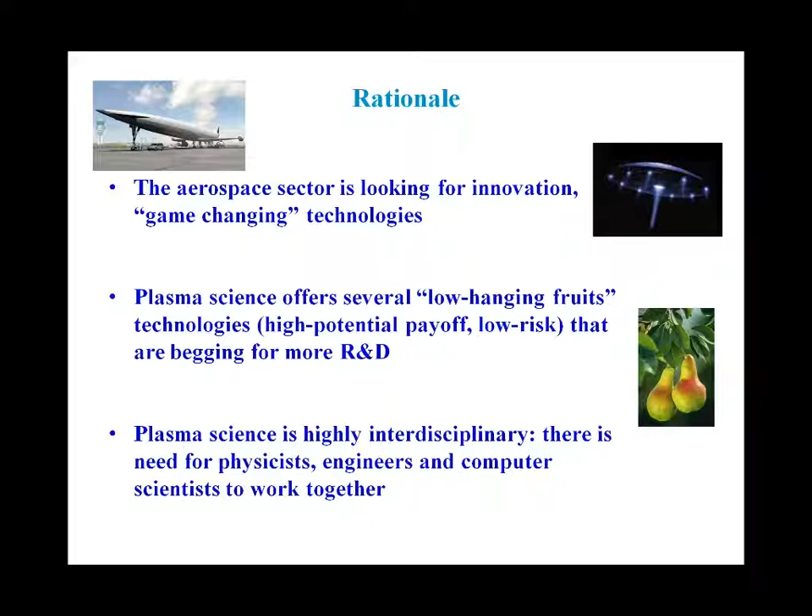Now as far as we are concerned, UHCL, we're trying to build a little more momentum in the collaboration with the local aerospace realities, which are mainly NASA and satellite companies. We also have a collaboration with a major aerospace engineering department — they being engineering and we being physics. This shows that we're implementing exactly what I said in the previous slide: we're trying to join forces to get some projects off the ground.

The purpose of this talk is basically to stimulate interest, whether it's somebody from NASA or from the university, to create a connection through students and the workforce that already works on NASA.

Well, we are in a sort of impasse, and everybody is saying, well, we can't do anything because we've got no money. So how are we going to get out of this? There is something that can be done with little — it's just a matter of striking an agreement with somebody else that's already working on it and moving on.

Another obstacle we face several times is that management will not jump into something new just because it looks good. You can say what you want, but you're not going to convince somebody who's never worked on, say, advanced propulsion before, to put money, time, and people into this new endeavor, even if it looks good and looks required and necessary. You have to build credibility — you have to have somebody else they can rely upon, to make them feel comfortable. That's when, with partnerships with universities and, for example, NASA JSC, part of these problems can be solved.

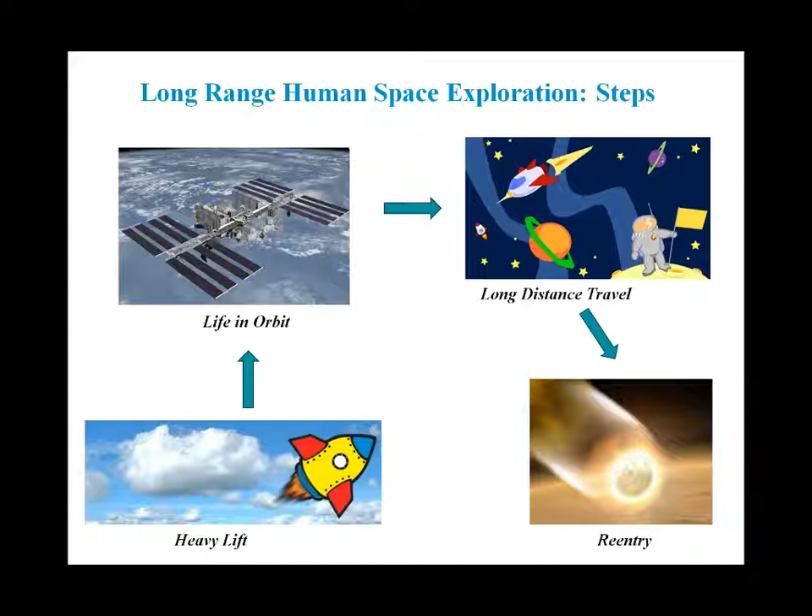The real problems are these: okay, the heavy lift is just a matter of money, and life in orbit — well, that's a picture of space junk.

We are not necessarily in the know for that. For long distance travel, space radiation is the main enemy. When the spaceship leaves the magnetosphere around the Earth, things are going to get much worse, because we're not in this kind of cozy environment we are right now. All the radiation we can get, we'll get, and sometimes the sun is misbehaving, so it's going to get even worse.

Re-entry is another critical phase, not just for landing back on Earth, but when you're talking about going to Mars, you can use the atmosphere on Mars for aero capture. But you have to design things properly. You can save a lot of fuel if you do things right, and you can control your descent carefully. That's obviously the Apollo capsule, like a fish out of the water. You can see the damage from the heat. Of course, it was designed to survive it.

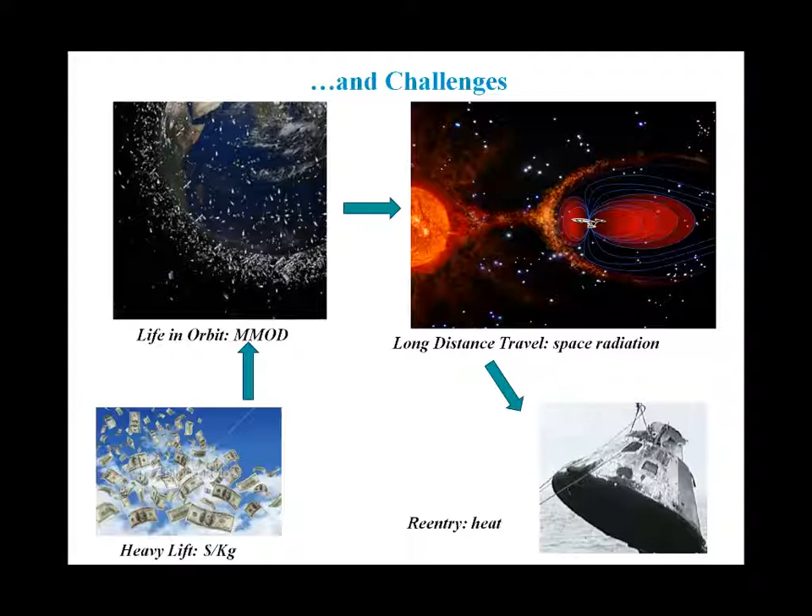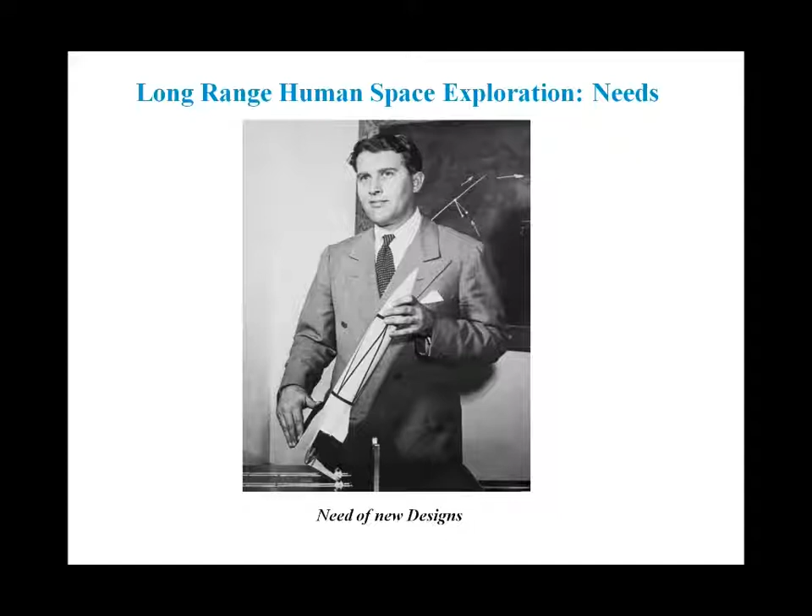All right, so what do we need? We need new design. This gentleman a little while ago came out with creative ideas, and that's how we made it to the moon. Now, can we match his ideas? Can we do something that at least gets close to that?

Since we were talking about plasma physics applications, I will briefly touch on what plasma is. Most people probably know, so I'm going to keep it simple and straightforward. Let's say plasma is what used to be at the beginning, it's something like an ionized gas, but a little different. I'll try to summarize the main point here. It's more of an academic distinction, if you like, but it has some engineering consequences.

So the first state of matter, at the bottom, lots of plasma, like the familiar plasma ball that everybody knows. It's an ionized gas, but when you have a distribution of particles that's almost uniform everywhere and doesn't allow for strong fluctuation of charge, and you have enough particles to produce collective motions where the particles move all together as opposed to single particle trajectories going around, that behaves like a plasma. So you can actually have waves and some plasma confinement. Those are the things we use to manipulate plasmas to create the technology that we want.

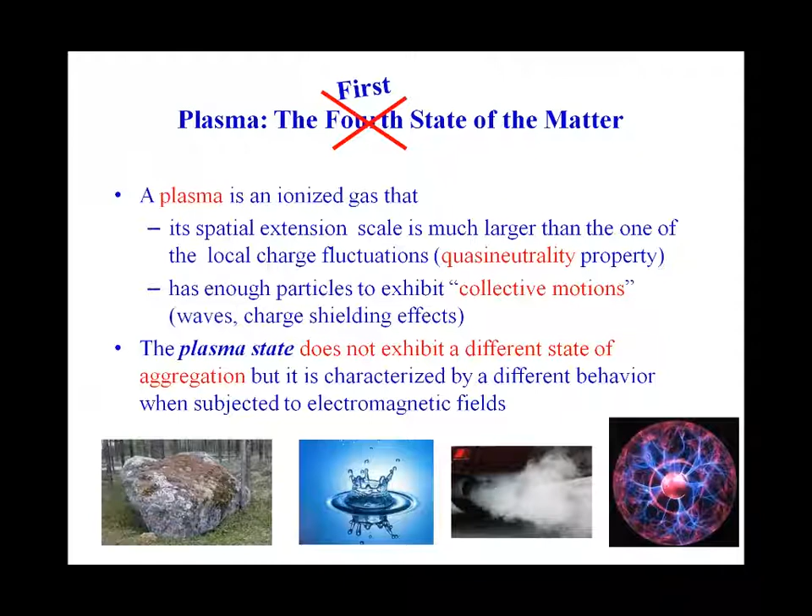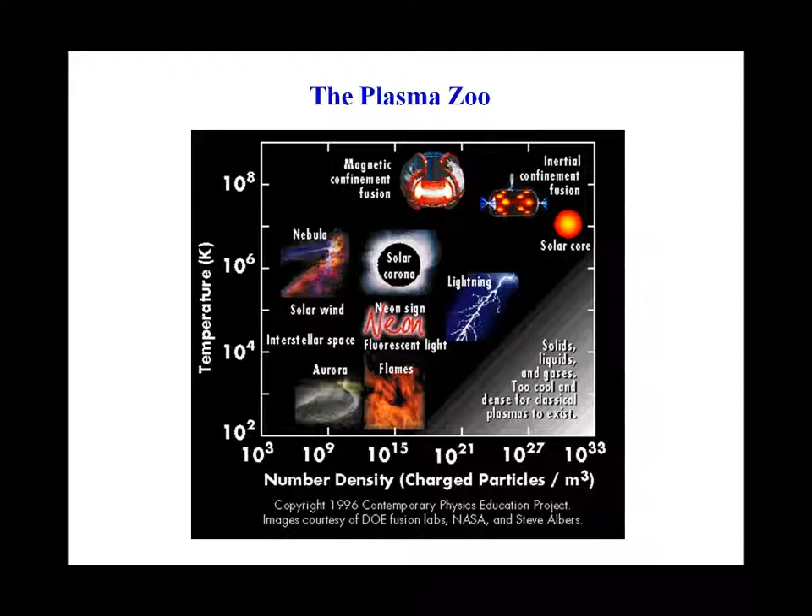Plasmas are everywhere, as you've probably seen this picture already too many times, but the point is that temperature and density are the main parameters spanning a very large range. On Earth, we're mainly concerned about cold plasmas; in space, on the stars, the plasma is much more energetic. Around the Earth, for example, the ISS is floating through an ionospheric plasma, which is very tenuous, yet it can cause a lot of damage because of the energy of the particles.

Okay, so this is enough plasma physics for today. These are some of the applications I want to touch on. Maybe there's something else, but these are perhaps the most appealing, and they fit the picture of the journey I described before: takeoff, heavy lift, life in orbit, a long trip somewhere, exploration, and if you get there, landing and coming back.

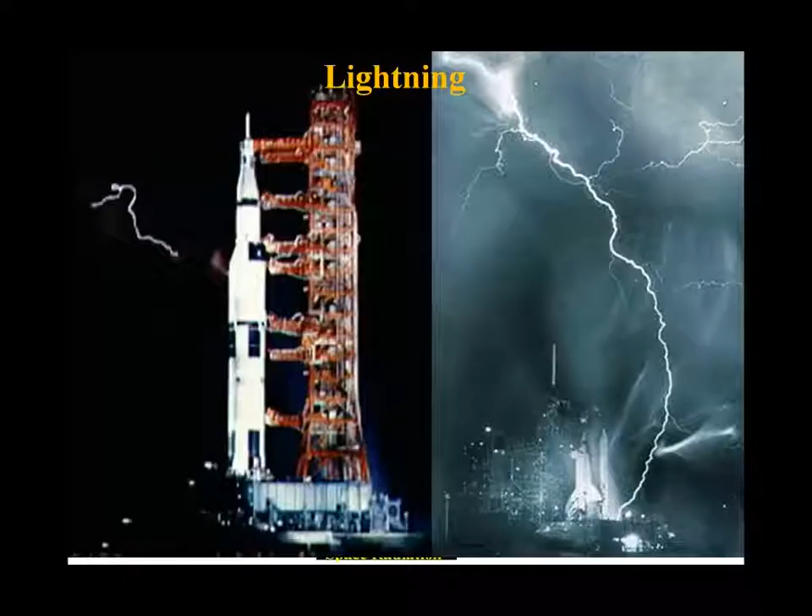What's the point here? The point is that right now we're moving towards composite design for aerospace, mainly aircraft as well, but both aircraft and spacecraft. So the conventional technology of basically making a missile out of a metal tube isn't going to be there anymore, and we're going to be exposed to lightning.

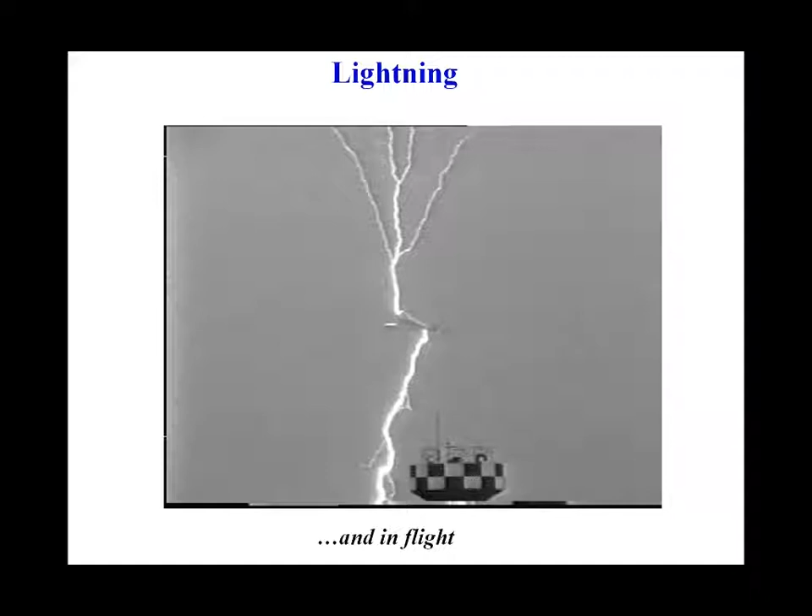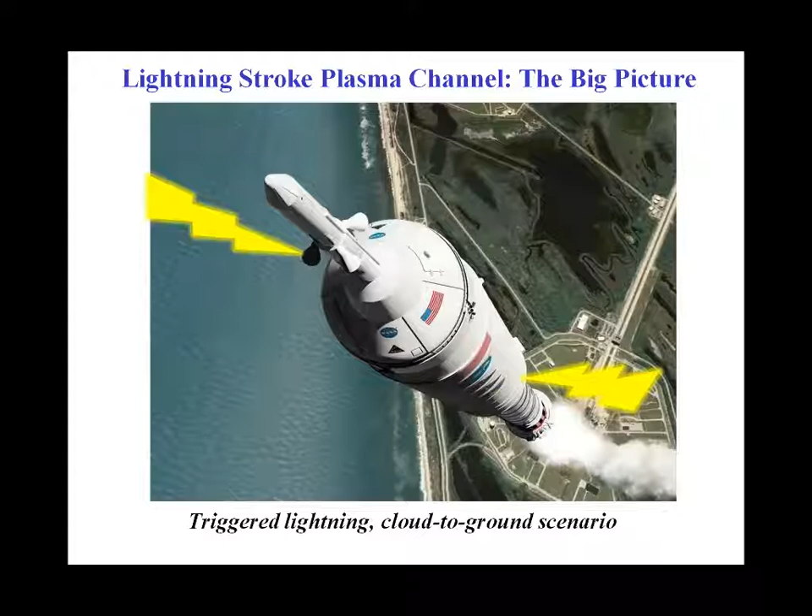Well, what happens is that if the electric field in the atmosphere, especially in the upper levels, is high enough, you can trigger a lightning strike. Because you stick a piece of metal into the atmosphere, you distort the field lines, and that's the kind of mechanism why you get lightning.

Now, if you launch something that does not have enough metal, it won't be certainly metal free. You can't make a rubber or composite metal free. Suppose the composite would be a shell around - okay, you still have metal, so you still have that effect. But the point is that if you don't have a metal shell, the lightning is going to hit you, and you're not sure what's going to happen next.

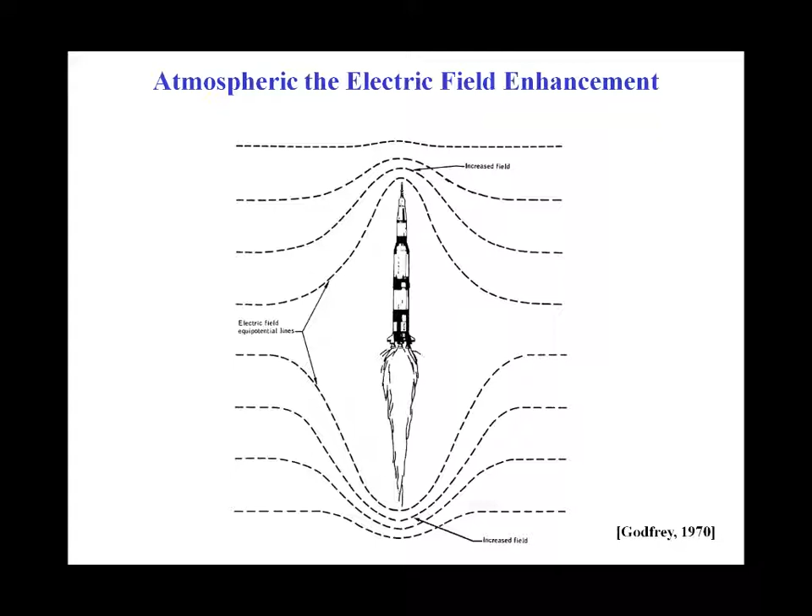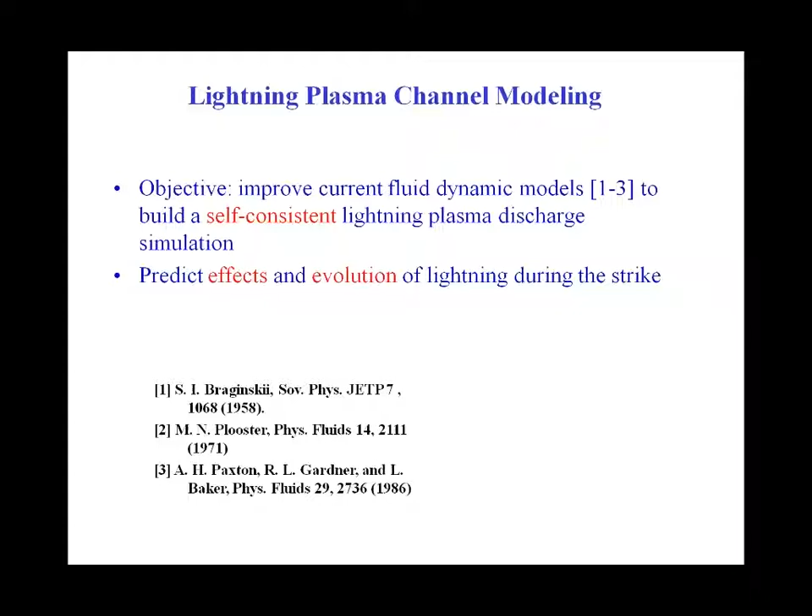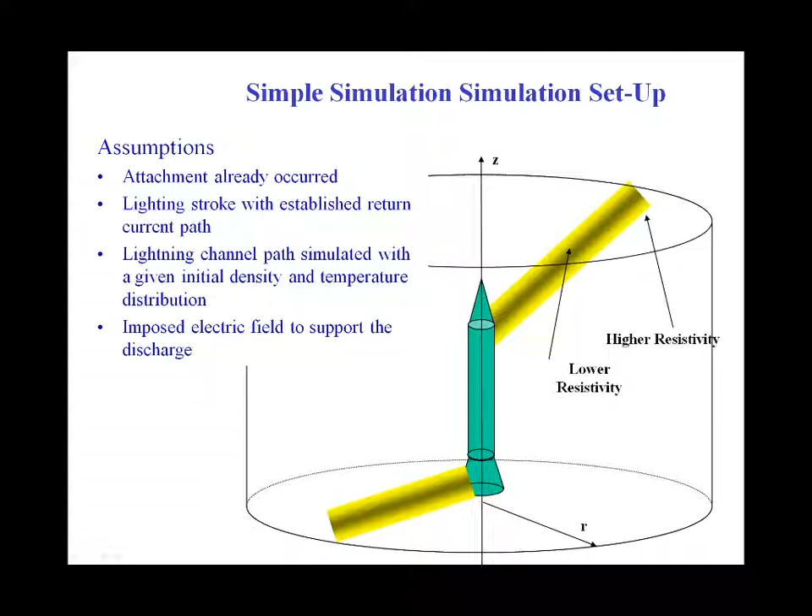So one application you can tap from is plasma modeling for studying lightning plasma, and this is an example of the kind of simple modeling you can do with a plasma discharge already set up. You have a sort of sketch rocket, and you can look at what's happening with the electric and magnetic fields while the discharge is running.

You can do something more, which has been done in the past. This is a sketch of a lightning discharge that hits this piece of metal here, and this lightning discharge is moving with velocity v right here. So we can actually simulate how the lightning discharge sweeps through the rocket, because when the rocket goes up, you have a relative velocity between the rocket and the discharge, essentially in the cloud.

And so you have this phenomenon where the lightning hits you here, and then the plasma flies through, and it may hit different points. So you can calculate the most probable locations for a lightning strike, but you don't really know what's going to happen next. So you're going to be very conservative and say, okay, let's put metal everywhere and make this rocket really heavy, to be safe.

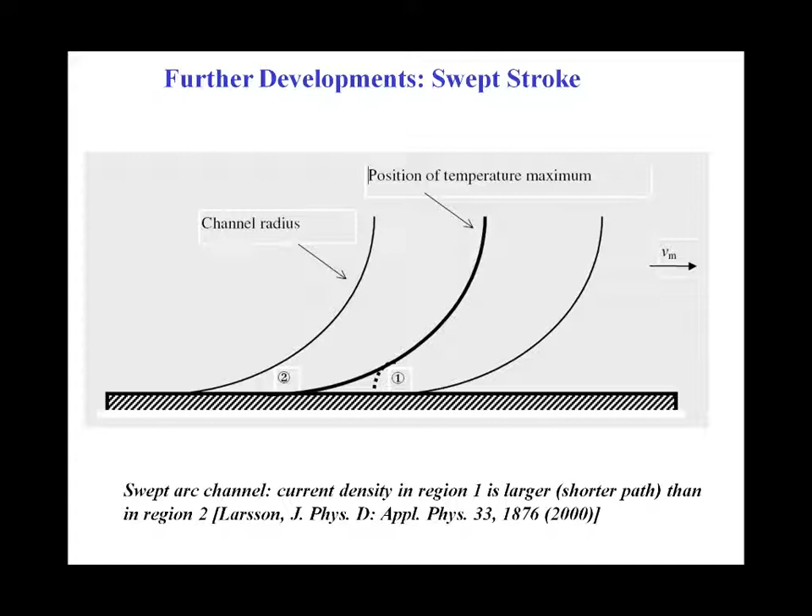But this approach is not going to fly. So you have to do the smart way - trying to figure out, okay, these are the critical areas, we're going to protect these, and then that's it. So this is what we can do with lightning plasma modeling.

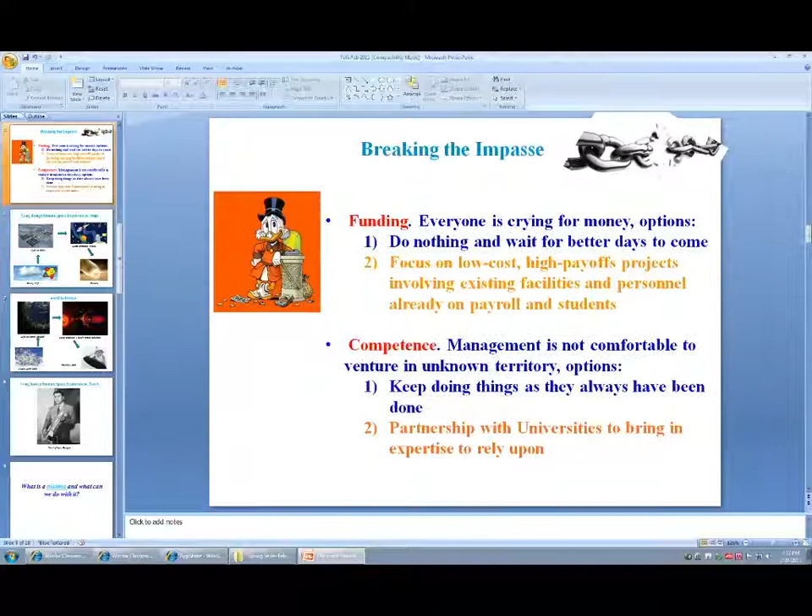Now we want to go up, right? We were here on the ramp taking off. Another issue is... okay, let me have it. Okay, I'm going to do it manually. It's not working.

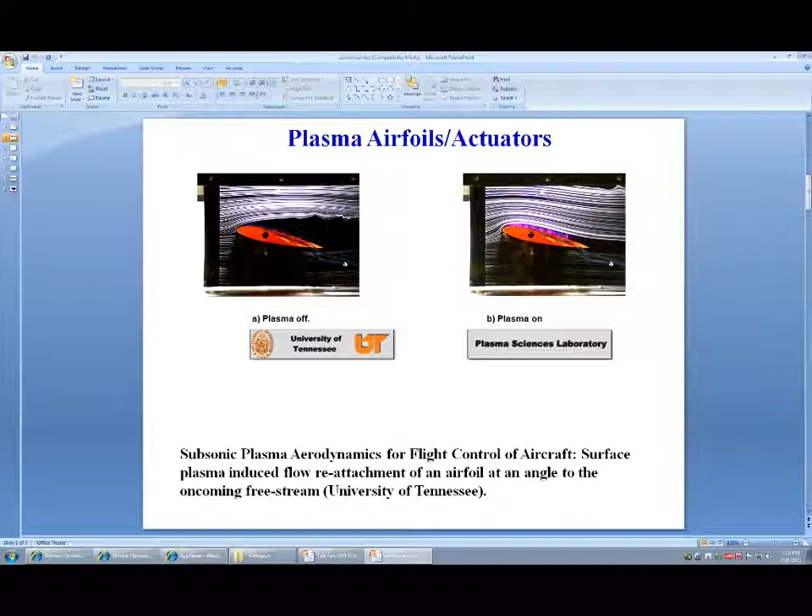Another issue is how to take off and send a heavy load into orbit. So, okay, well, we know how to do it - we went to the moon, so obviously we know how to do that. But the point is, it's expensive. Is there a better way to send a pound in orbit and pay a lot of money?

These studies have been done for quite a while. Started in Russia, with applications for hypersonic aircraft. There were some aircraft concepts that were supposed to go at Mach 7, 8, or even 10 and beyond.

Well, what happens is that at that speed, the scramjet, the supersonic combustion jet engine, doesn't work very well, so the efficiency is lost. So, well, you can stick to a rocket, but then the problem is the rocket has to carry both oxygen and liquid hydrogen. If you're using liquid hydrogen, you have to carry the oxidizer with you - you can't take advantage of the air anymore.

So you want to still take advantage of the air, burning fuel using the oxygen of the air as much as you can before switching to a rocket. But if you're going that fast, the efficiency goes down.

So what we're trying to do, the idea is to take the air that comes in and make it go through an MHD generator, which I'll show you what it is. It's something that produces electricity, and it slows down the air a little bit. And then we go through the regular jet engine and get it exhausted out.

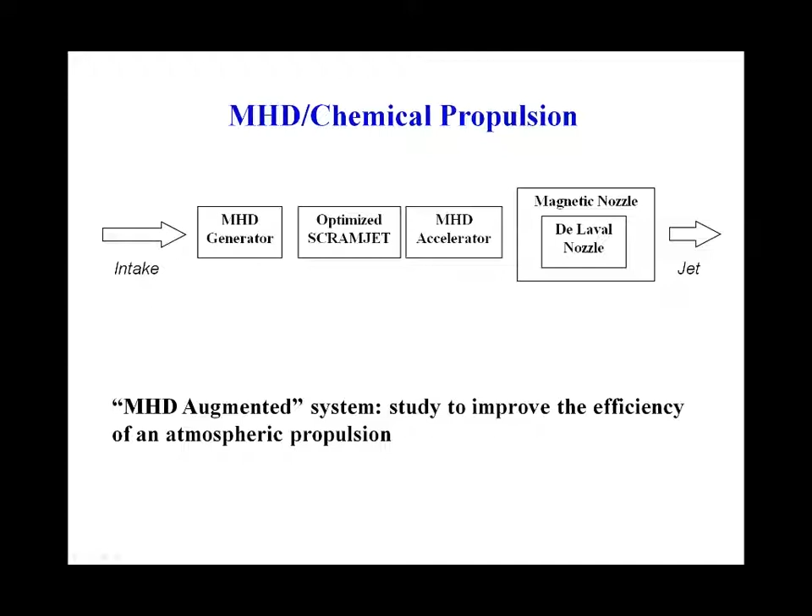So the idea is that there are two simple concepts. One is called MHD generator, the other is called MHD accelerator. The generator is something where you're making a box with a hole, a pipe basically, and you're sending air through, but this has to be conductive, so it's a plasma, an ionized gas.

It enters this way and comes out the other way. If there's a magnetic field that crosses this way, and these two orange things are electrodes, metal things, you can actually draw current. You can turn on the light, using the kinetic energy of this ionized gas that goes through, and because of the effect of the magnetic field, you're collecting charges on the electrodes, and you can run electricity to it. You can charge the battery anywhere you want. So that would be the intake of the supersonic or hypersonic craft, and you're producing energy.

And you're slowing down the flow. Then when it comes down to the end, the other side, you can do the opposite. If you are going to provide electricity between these two electrodes, and you still have your magnetic field, then the working fluid, which is still ionized gas, gets a kick. This is called MHD acceleration.

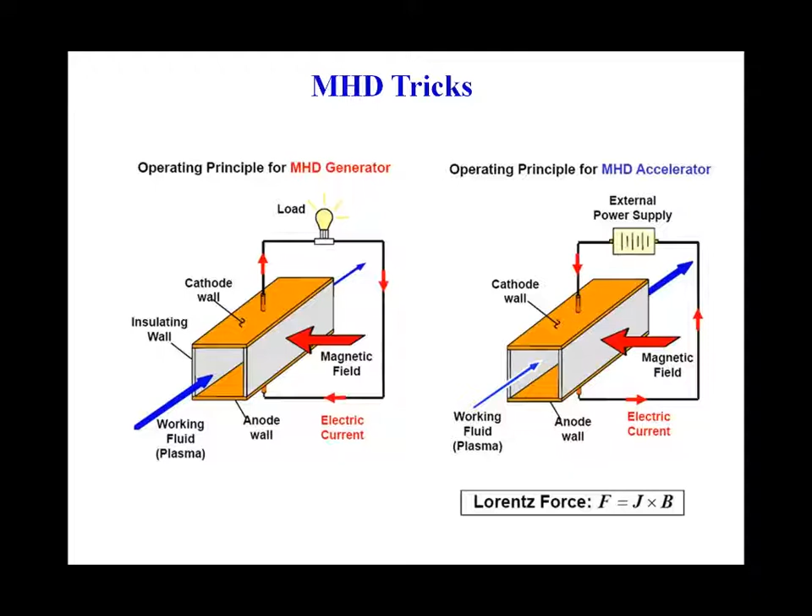So you can play this game. Of course you're going to have losses. If you're producing energy on one end and then you put it back on the other, you're going to lose something. But as I said before, the whole game works because the scramjet efficiency goes down drastically at Mach 10 or even beyond.

So that's what they're planning to do. These are one of the many concept designs of aircraft that fly at Mach 10 or above. If you look at the bottom here, it's sketching the bottom of this aircraft where the air comes in and then gets kicked out. Several studies have examined this, one very recently. This stuff is actually very recent. It started a long time ago, but it's been worked on at a very low level.

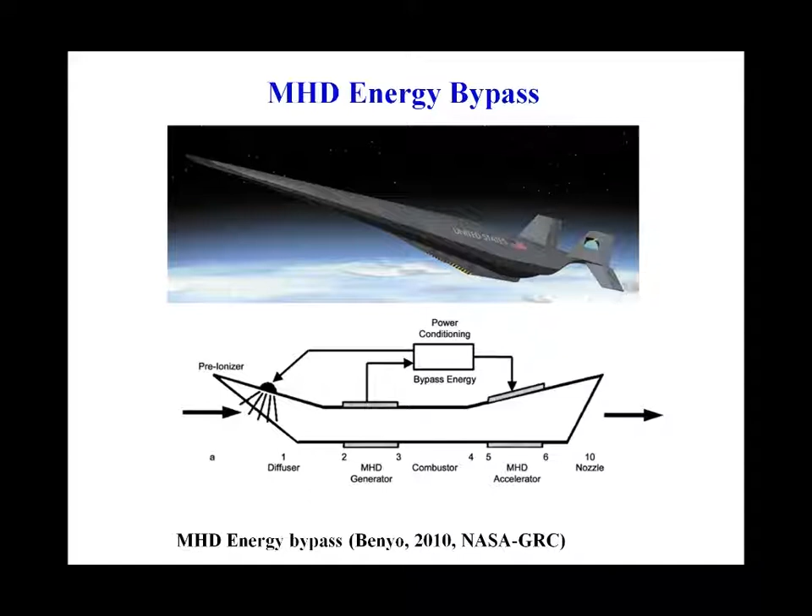So the idea is that, again, you have an MHD generator here, then compressors, turbine - that's conventional aircraft stuff - and then an MHD accelerator and a nozzle. These are actually the pieces or the working pieces that have been used to do this study that are real things. You can calculate how the system will be efficient, and it takes a lot of engineering. That's great.

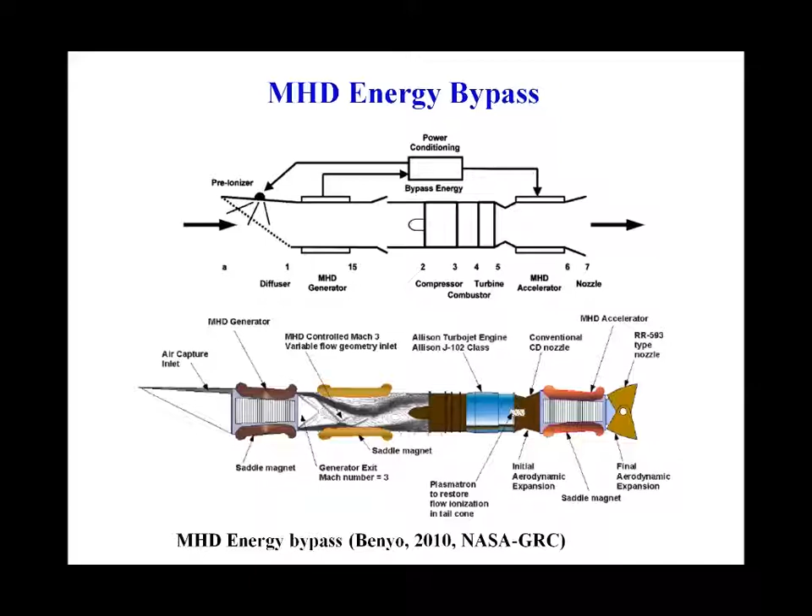All the different pieces have to work, obviously. The more efficient you are, the better. This has been done at Marshall, the NASA Marshall Space Center, funded by the Air Force with other collaborators.

This is just to see how this MHD generation process works. So this air comes in and becomes a plasma, then it gets through this MHD generator and it gets out. This is a sketch of this device. The air comes through here, there's a magnetic field here, this is the coil, and this is the last part, the exhaust. These are the actual real pieces.

Similar experiments but with different arrangements have been done, still at Marshall, for the actual purpose of propulsion.

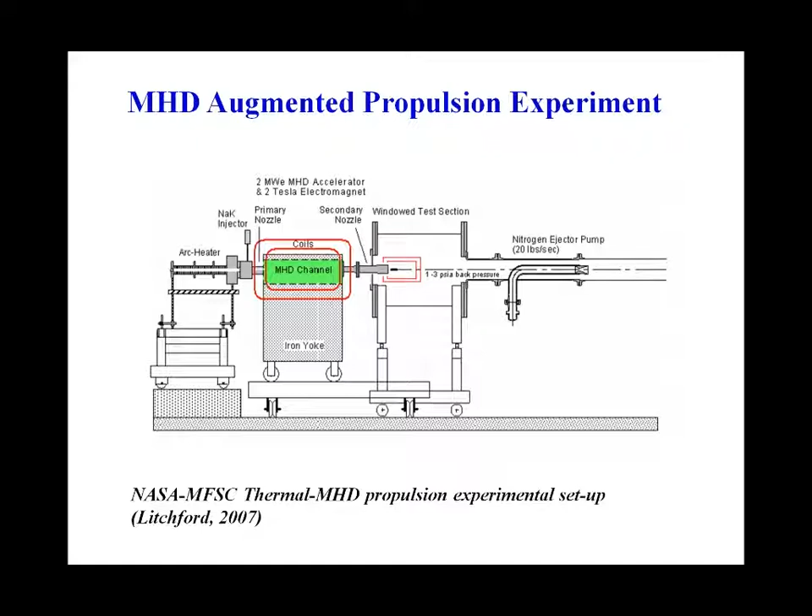All right, well, this was not the automatic way, so I have to get out of this. All right.

So the point of this was: we can improve conventional rocket propulsion with plasma dynamic systems, essentially magnetohydrodynamic efficiency. Now we're getting to orbit, and we are maybe staying on the ISS, but we want to go somewhere. We need a rocket to go somewhere from orbit to see a planet.

The electric propulsion is the way to go if you want to go somewhere.

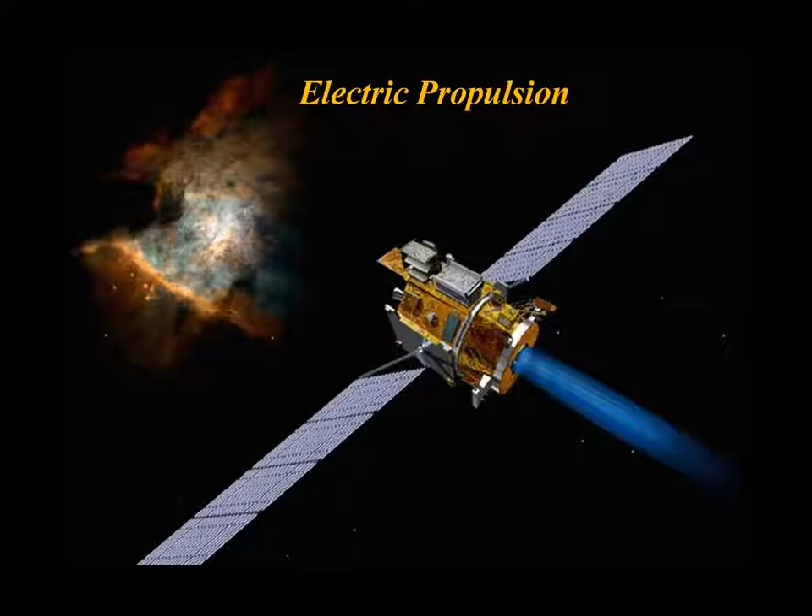The way we made it to the moon is just too expensive for going to other planets. I mean, you can still do it, it's just building very, very heavy rockets and sending everything to orbit and stuff like that. So you probably heard this before, especially here in Houston, we've been trained a little bit because of the activity of the former Advanced Space Propulsion Laboratory at JSC about this need for electric propulsion.

The business boils down to this equation. It's called the rocket equation. It simply says, well, if the exhaust velocity of your rocket gets larger, the delta M, which is the fraction of mass that you need to eject, gets smaller.

That means for a certain delta V, for a certain acceleration that you want to have, you need to carry less fuel with you. So if you're able to throw this fuel out of the rocket faster, you need less fuel. That's the whole trick of electric propulsion. We're using faster ejection and less mass.

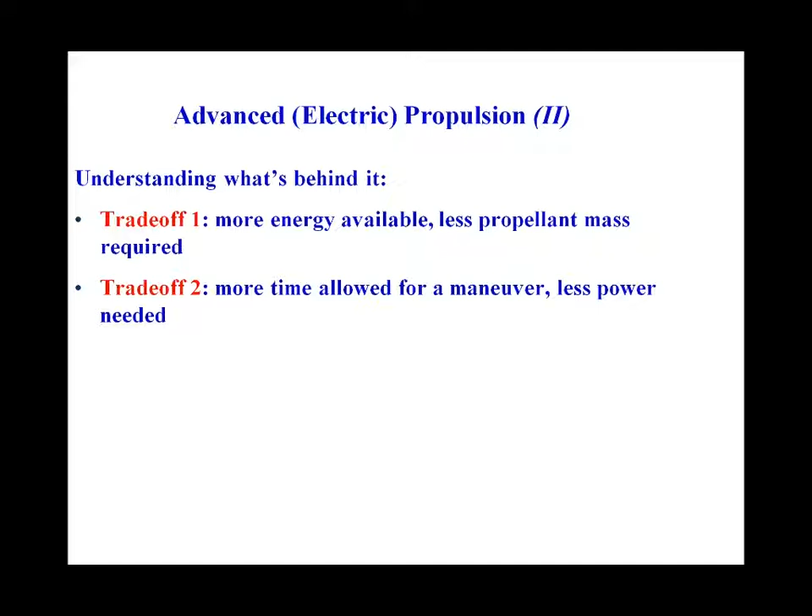So the trade-off is: the more energy you have available on board, the less propellant you need to carry with you. And if you have time to do a trip, then you don't need that much power, obviously. But the point is that you've got to have electric power on board — beefy electric power, at some point it becomes beefy.

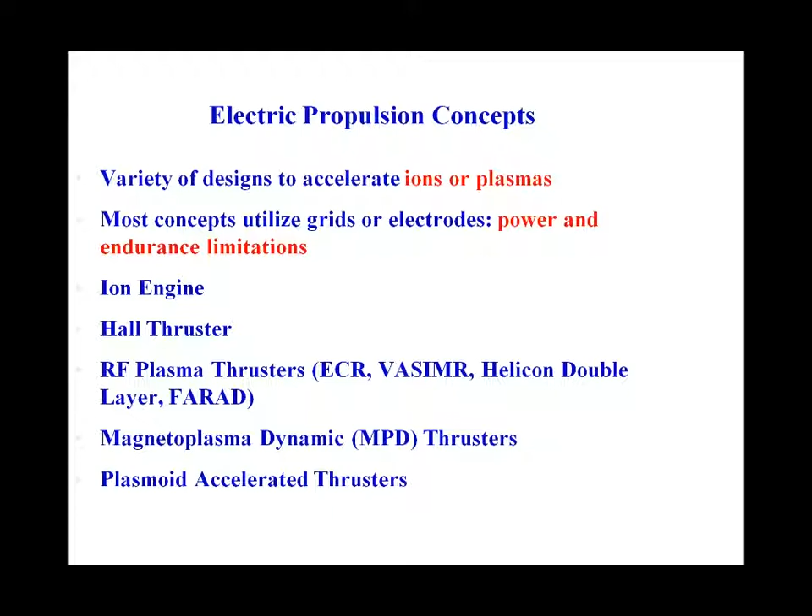Okay, there are a lot of ideas, a lot of thinking has been done on electric propulsion concepts. I'm going to just glance through some that you might have heard, some of course you heard, some less heard. The first one is the ion engine.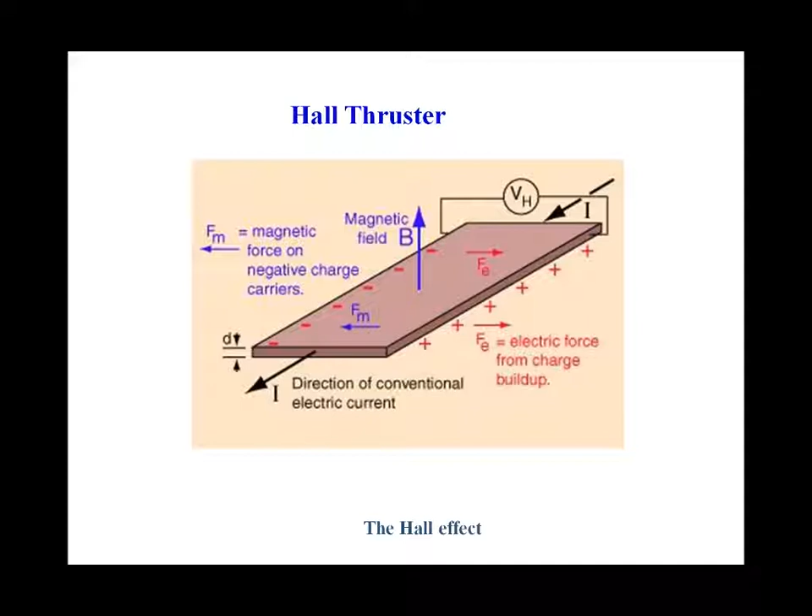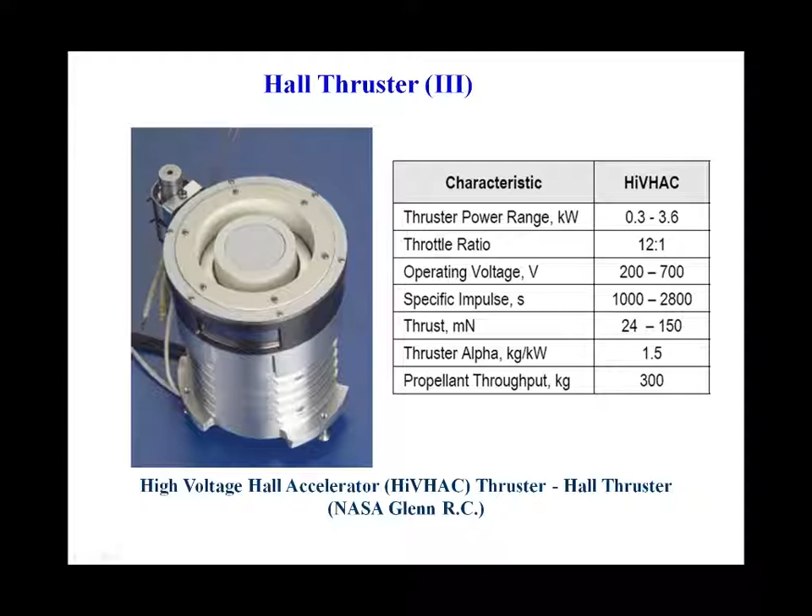That's the way it looks like. Note that we have fairly small thrust with this example. The specific impulse is 1,000 to 2,800 — not super high, but it's got a decent kilogram per kilowatt factor. They build all kinds of shapes and sizes.

This one you're probably very familiar with is the VASIMR, that was developed at JSC and is now the proprietary project of the Ad Astra Corporation here in Houston.

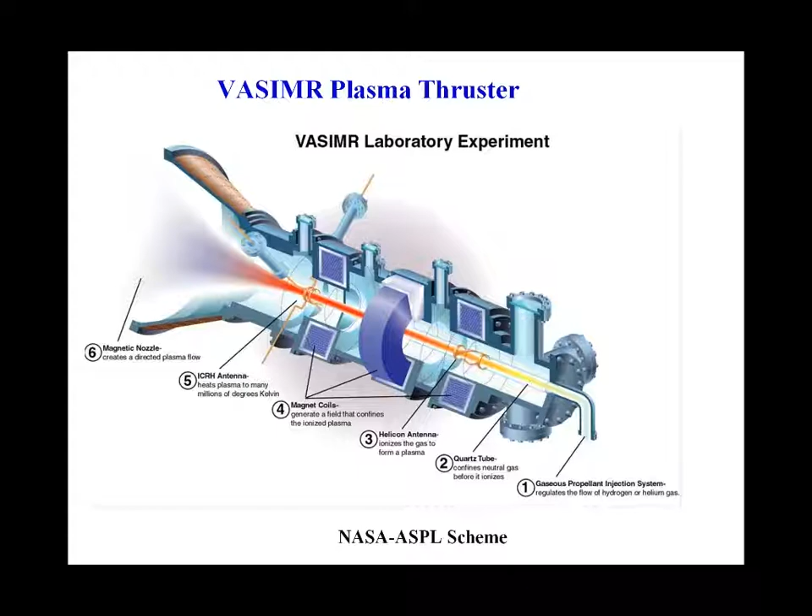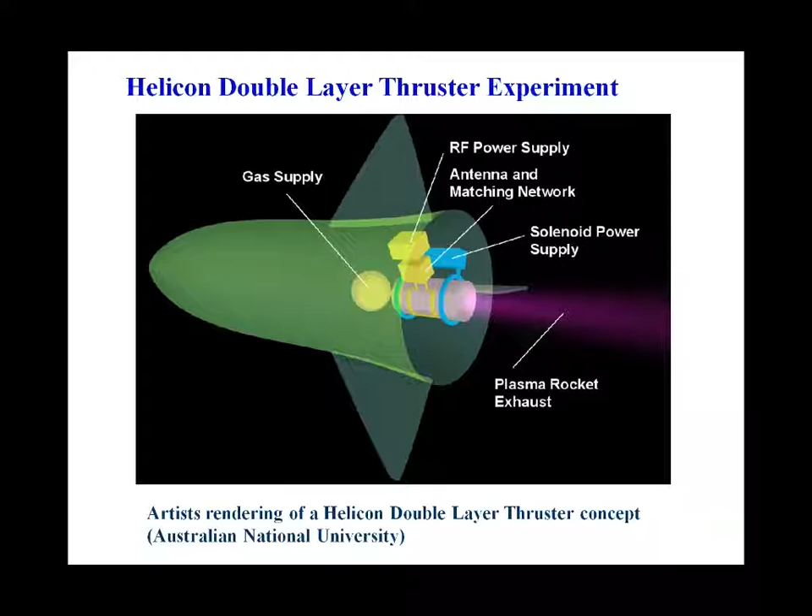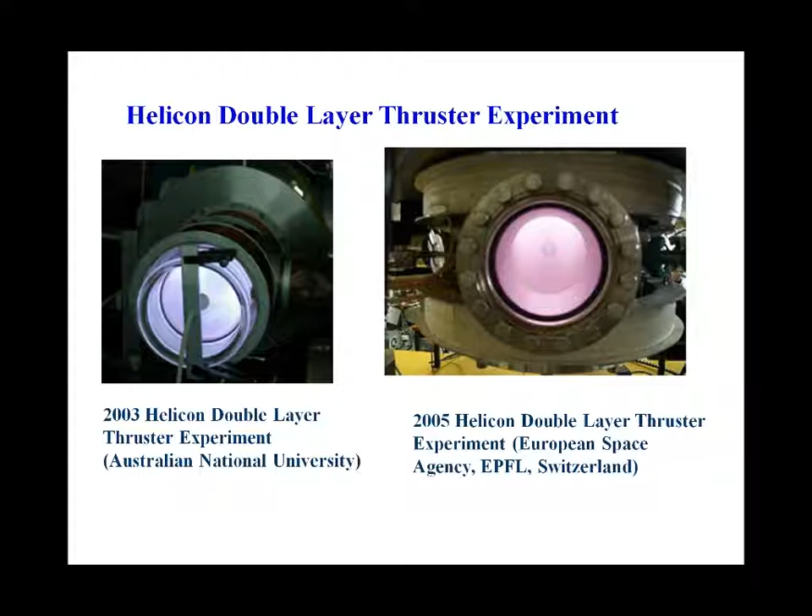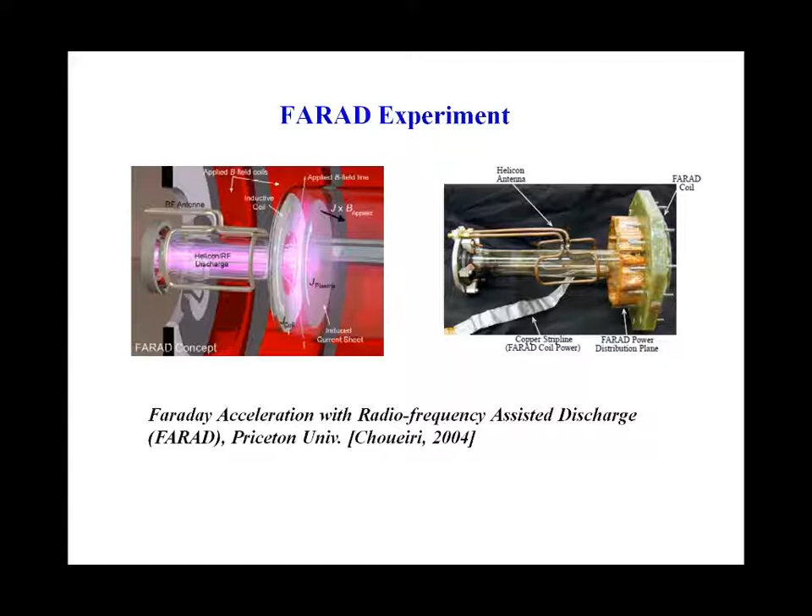Another experiment was done in Princeton, again based on the Helicon discharge. So all these experiments I just mentioned use radio frequency, and they do not touch the plasma — this is what we're trying to do, stay out of electrodes. We don't want to have a strong current going through these metals. This seems to be the most appealing thing, especially for long-term applications for a spacecraft that takes two to three years to travel somewhere. You don't want to have a strong current going through an electrode and suffering erosion.

Another experiment was done in Marshall, University of Alabama, in collaboration. In this case, they were accelerating little blobs of plasma through a magnetic field, essentially.

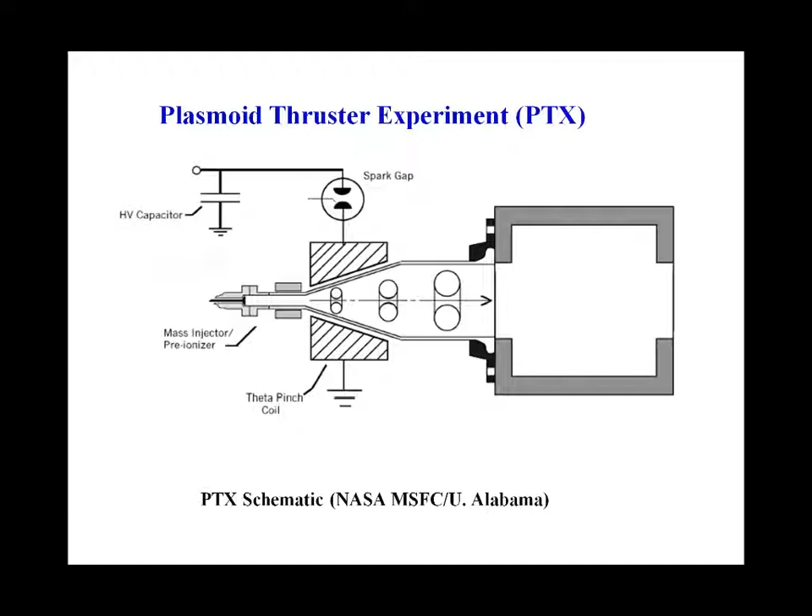The applications of electric propulsion are not just long-term interplanetary missions. The commercial sector is already using them, using Hall thrusters to keep satellites in orbit. You don't want to lose precious assets after two years when they run out of fuel. And of course, there are defense applications as well.

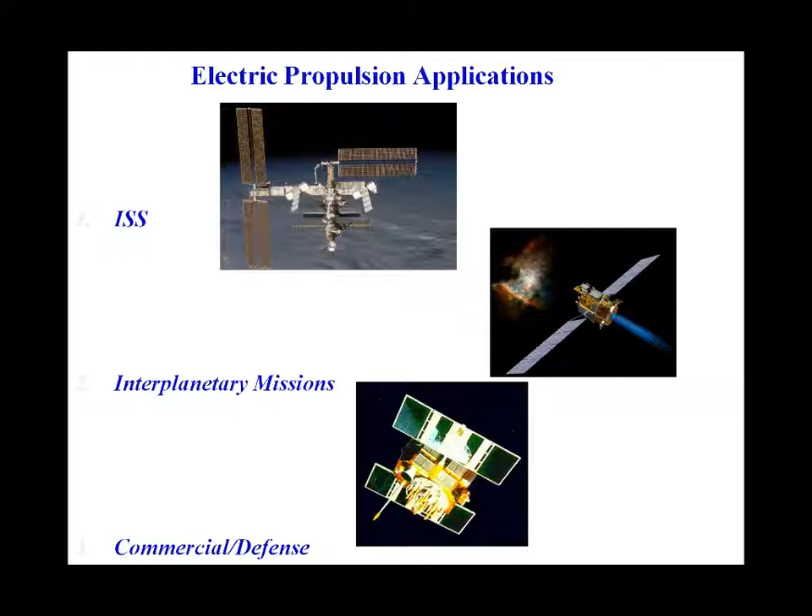I talked last time about this. I also would like to mention that the cost of keeping assets in orbit is not negligible. This estimate was done a few years ago, so maybe the number isn't quite right now, maybe it's a little more, but it's still a lot of millions of dollars a year just to keep the ISS in orbit, because you have to lift fuel and send it up just to give it a boost.

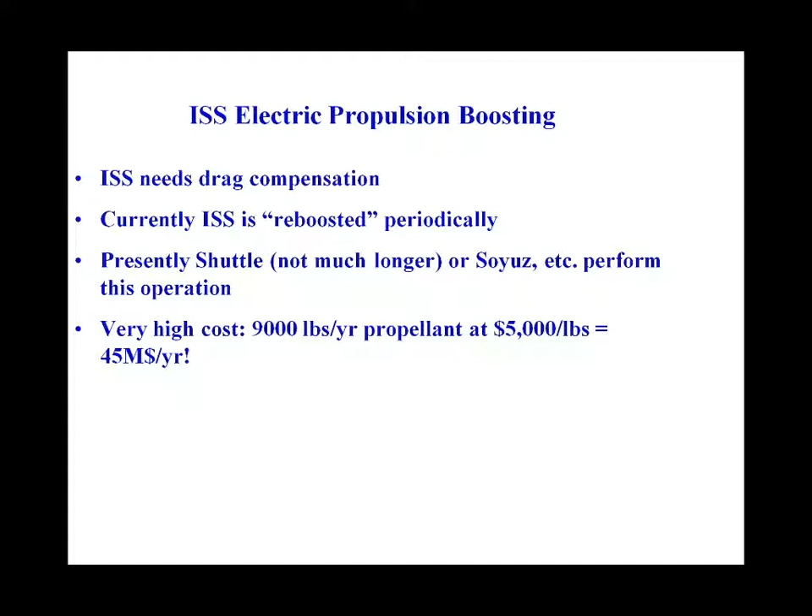Okay, how are we doing on time? Okay, so time to...

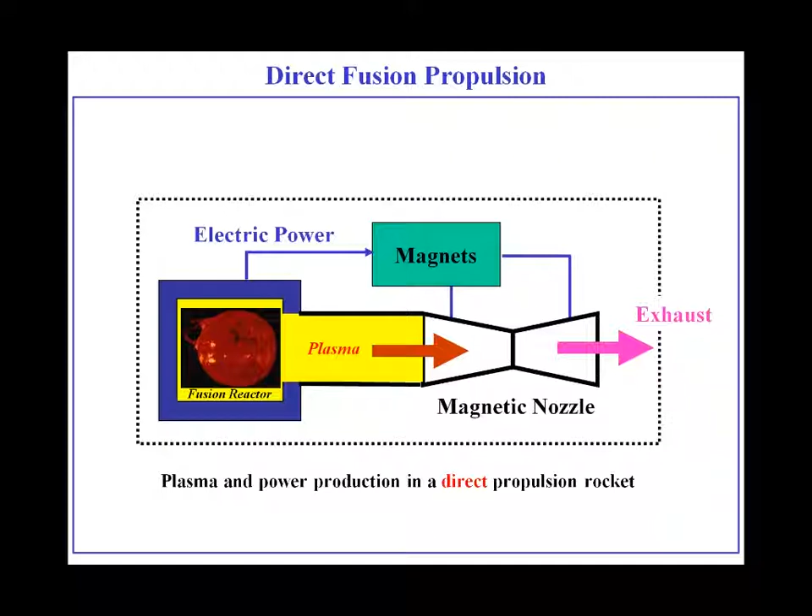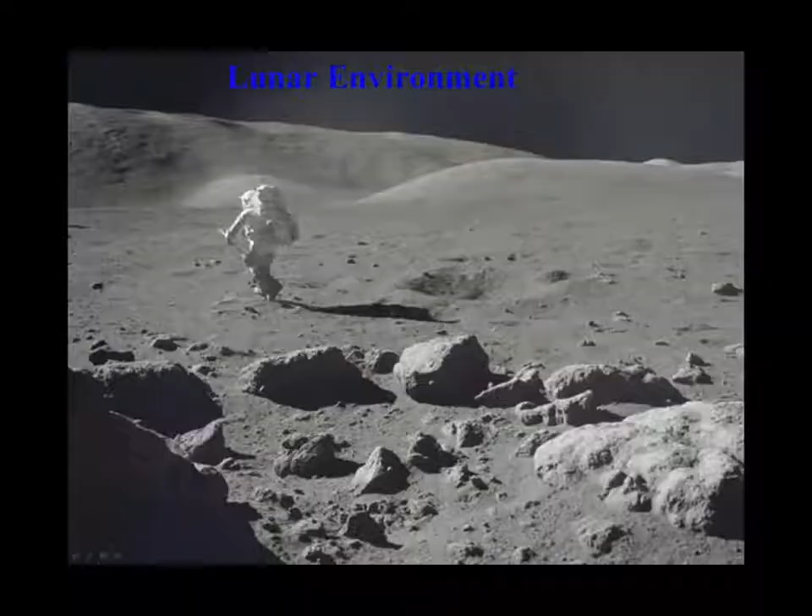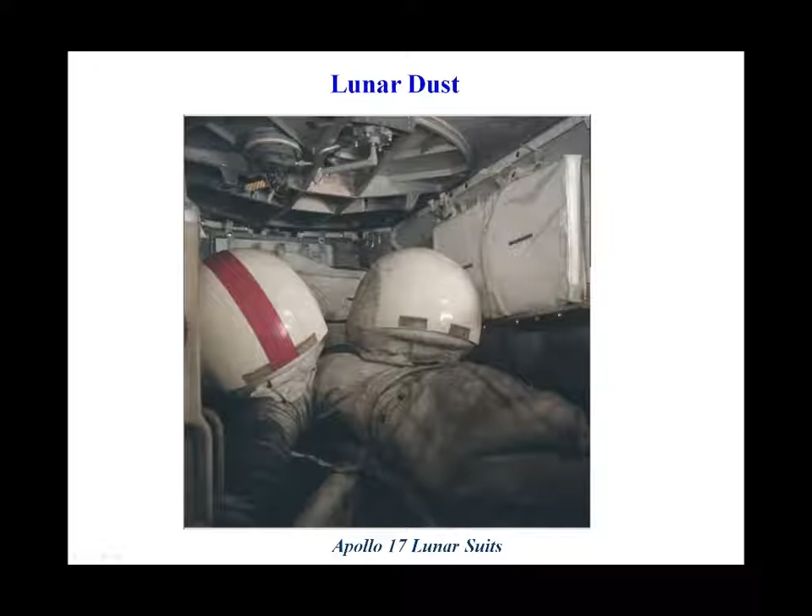Another interesting thing is what we're doing when we go somewhere - we just walk around and explore. This is what happens on the moon. On the moon, there's no atmosphere, and you have a lot of dust everywhere. The fact that you have no atmosphere means the dust particles don't stick to each other. What you have on the moon, close to the surface, for all intents and purposes, is a dusty plasma, which is not a term I just created - people actually work on dusty plasma, and you can find them in the literature.

These are plasmas that are not made of ions and electrons, but are made of little grains that are electrically charged. They seem like ions, but they're a lot more massive. So you study the physics of dusty plasma the same way you study the physics of regular plasma, just scaling masses and a few other things.

So if you're thinking about long-term exploration of the moon with human establishments, little cars going back and forth, and humans roaming around, at some point you're going to have a problem with the dust. The dust is going to get everywhere, into your gear, causing issues related to reliability of equipment. There are ways to protect against some of the impact of dust on gear using electromagnetic fields, taking advantage of the fact that this dust is electrically charged. So you're using plasma physics to control this flow and find ways to avoid it.

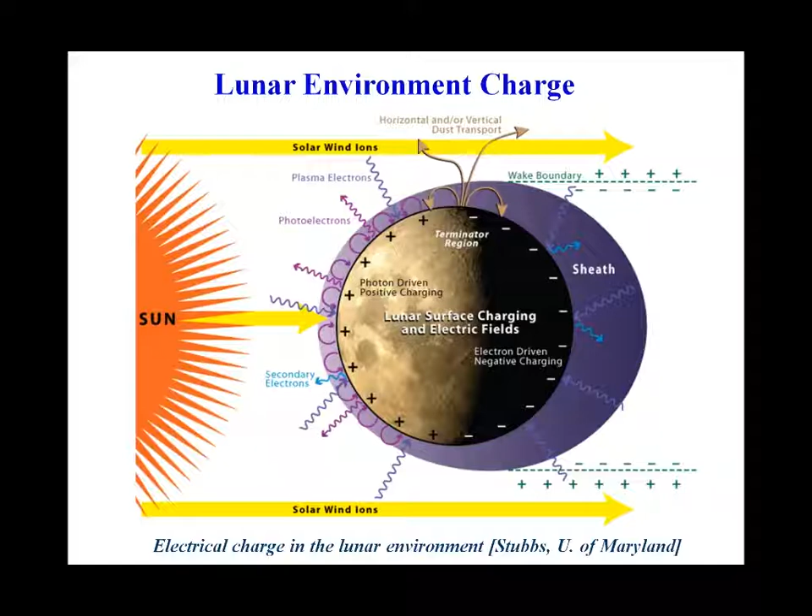Well, I'm not going to go into detail. Another thing I'd like to mention is something that can be used in takeoff, re-entry, supersonic and hypersonic aircraft, after aerocapture on Mars for example, or any celestial body with an atmosphere where you want to use the atmosphere to slow down as opposed to using rockets, which of course saves fuel. So you've got to control your descent and trajectory.

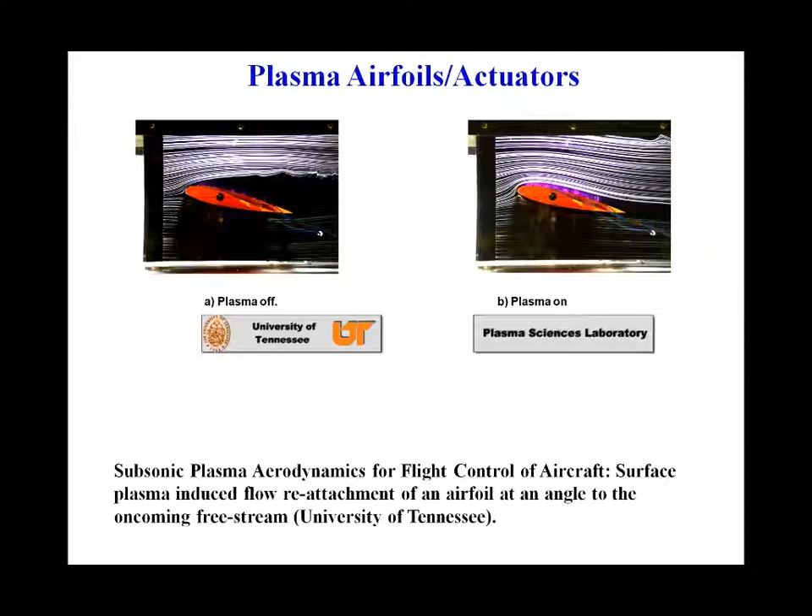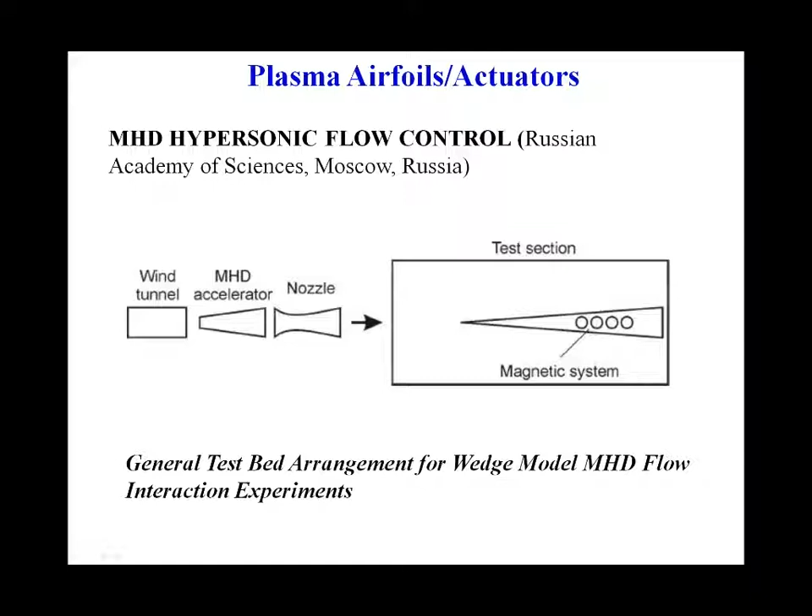The experiments have been done in Russia using a wind tunnel followed by an MHD accelerator, which gives a really fast speed to the wind tunnel that you cannot achieve with conventional methods. So you're essentially simulating a supersonic or even hypersonic airflow. Once you get through this nozzle and into a chamber, you can put a wing-like device and study what happens when this flow hits the wing. Inside the wing, there's a magnetic system, coils, simple coils, so you can study what happens if you put a magnetic field with this ionized flow.

This is similar to what you get in a reentry phase when your craft is coming down. You have really strong friction between the craft and the air, which produces a lot of heat and some ionization. You get a famous plasma around your craft, and that's enough to block your communication, as you well know.

You can use that plasma to your advantage, having a magnetic field on board to control how the plasma goes around the craft, with two purposes. One is to shield the heat, to deflect it from the actual surface to the flow that goes around, so your heat protection requirement is drastically reduced. Secondly, if you have a system on board that collects electricity on surface electrodes on the fuselage, you can draw a current for the MHD generator effect that I explained before.

And if you use this current on board, you're essentially slowing down the aircraft or spacecraft, because you're using the kinetic energy of the falling craft to your own advantage. So you're losing kinetic energy, and in a sense creating a parachute effect.

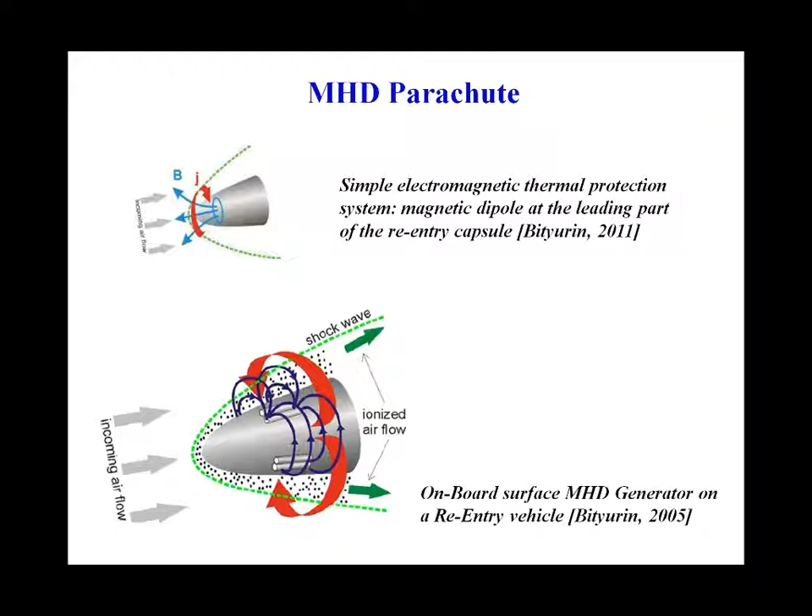This has been studied. These are the electrodes on the surface, on the leading edge of some airfoil or whatever surface is exposed to this airflow, and inside there is a magnetic field. The electrodes are right on the surface, so they don't stick out and produce any resistance. This is an actual experiment done in Russia.

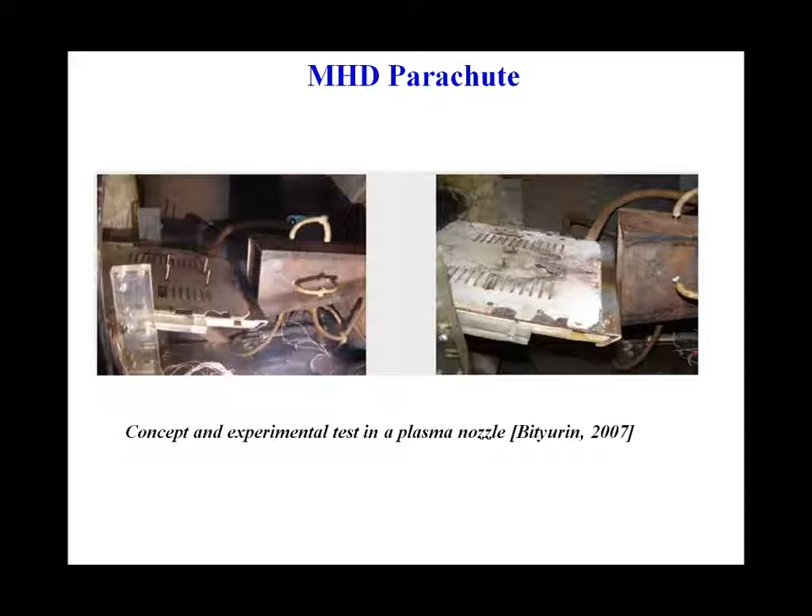It's an idea I've been working on, where you create a plasma flow inside a wing or any part of the aircraft where you duct in air, like with hypersonic concepts. They always have an air intake somewhere to feed the engine. So if you put a coil around this duct and ionize the air, which you can do in the lab, you can sprinkle some electrons to make it even easier, or seed the air. There are different ways to turn the airflow into a plasma, basically.

Then you have a plasma that goes through the duct, and you can control this plasma with a magnetic field. What you need is a fraction of a degree of tangential deflection to create a force that will control the aircraft, and you can do this in real time with an electronic loop system. So you have essentially an autopilot that acts on a 1 microsecond time constant instead of a millisecond on a mechanical system.

All right, I think it's about time to close and wrap up here.

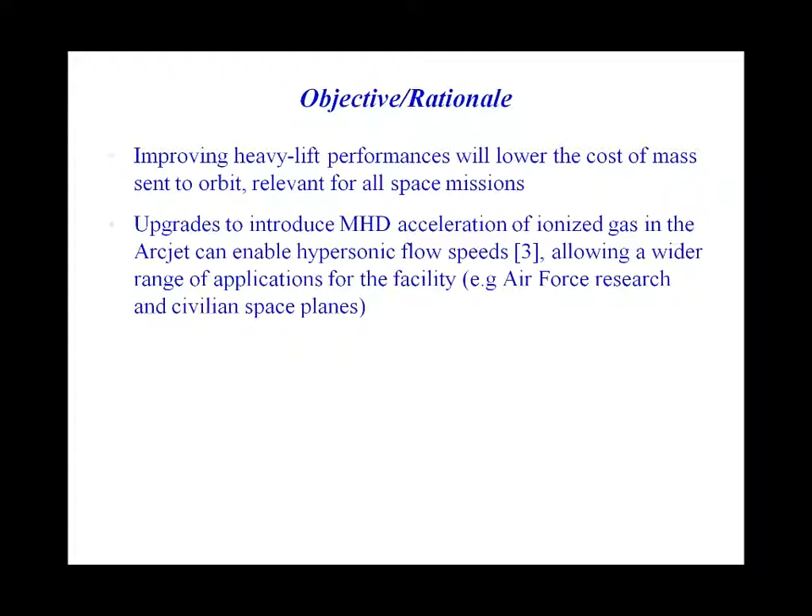I've been touching on some examples of what can be done. The whole point of this talk was to get people excited about collaboration, so students can come to the university and do a master's thesis or PhD work in collaboration with NASA or aerospace companies, for example. This MHD augmentation is what I mentioned before, which could be done with the current hardware we have here in Houston. We can do a lot for little, basically. We made some assessment, which is what NASA likes a lot: the technology readiness level, a DoD concept borrowed by NASA with some changes. This is where this would fit, as a technology development.

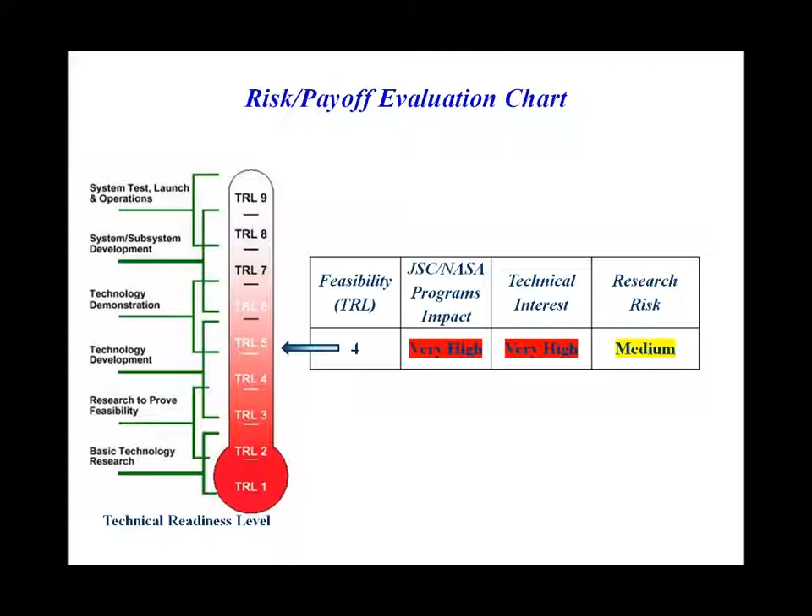It's not basic research. It's got some real engineering, interesting applications, and it's timely. It's something that people need right now for heavy lift.

So other examples are, of course, what we're doing for the nozzle and for electric propulsion. This is something that's actually currently going on at UHCL. We've got a little grant, and some work has been done. It's actually going on right now.

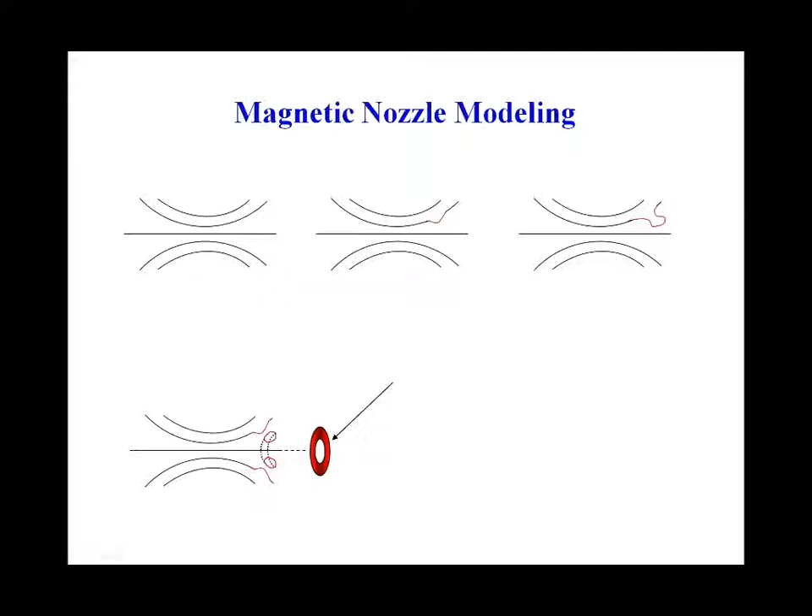The magnetic nozzle, as you probably know, is some kind of diverging magnetic field that looks like this. The flow goes through and gets ejected. How that gets ejected is a little different than a conventional rocket nozzle. You can see the plasma being turned into some structure like this, or a little more complicated. But we're trying to figure out how this nozzle works, and we're doing it computationally.

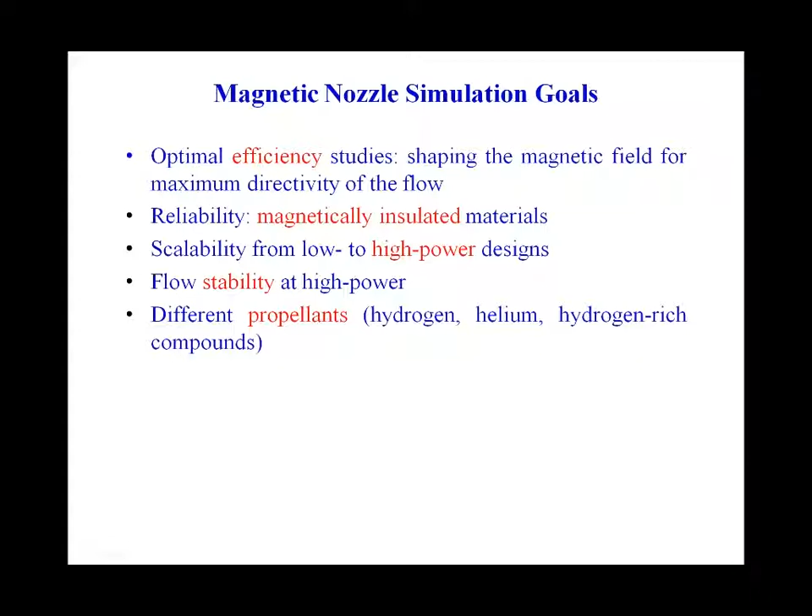A code has been written and used originally for magnetic fusion energy applications, but has been adapted a bit, and we can study how the magnetic nozzle, which is the critical element for plasma propulsion, whether you want to use any of those electric propulsion systems I mentioned before, works. You end up ejecting a plasma somewhere at the end. You want to study all these things. You want to make sure the efficiency is great. The higher the efficiency, the better.

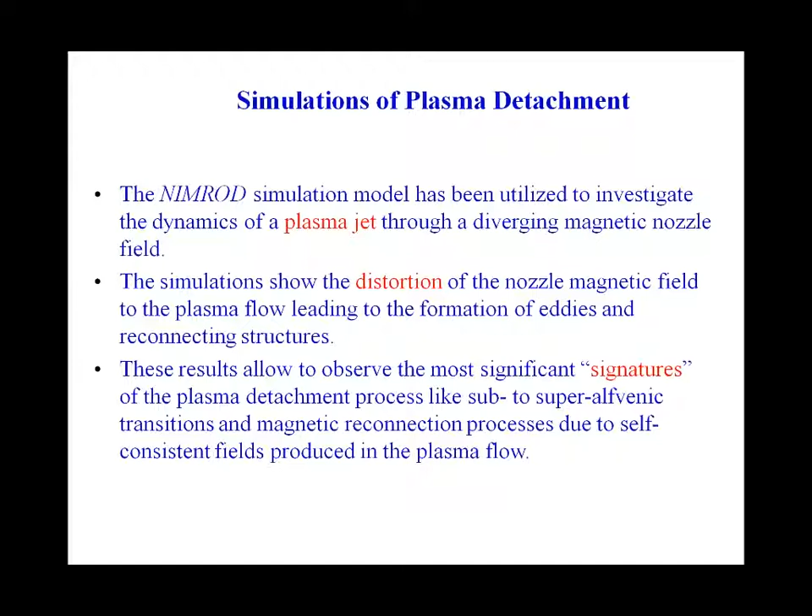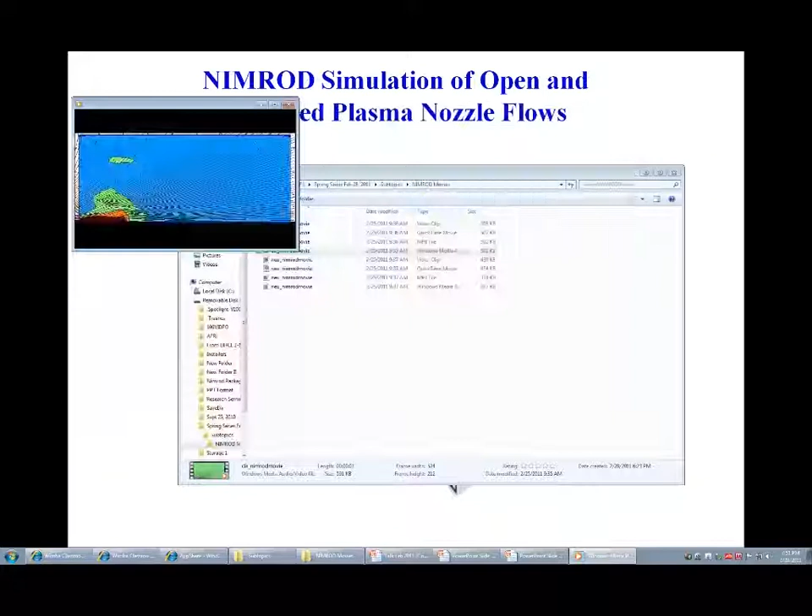So we're looking at what happens to the plasma. We want to make sure that it leaves the rocket. Without getting into detail, let me show some examples. This is an example of a plasma flow that goes through a magnetic field, and you can see that this should work.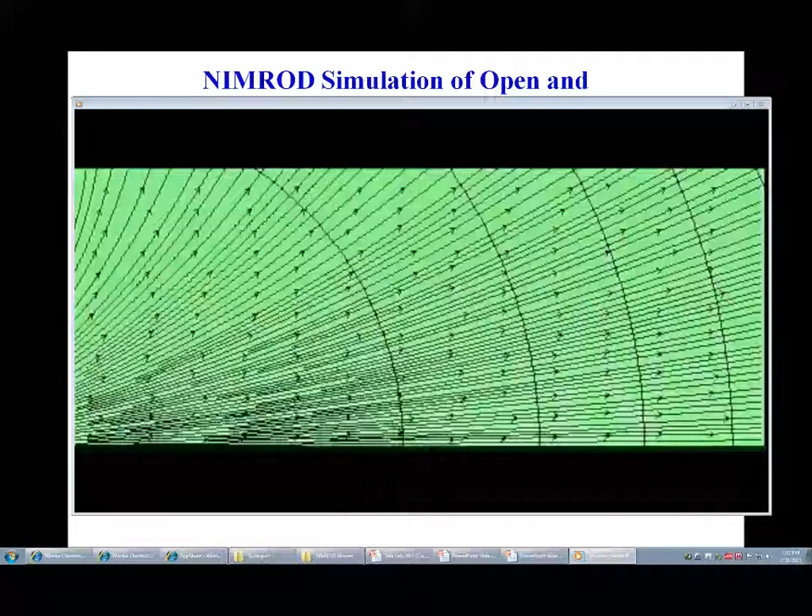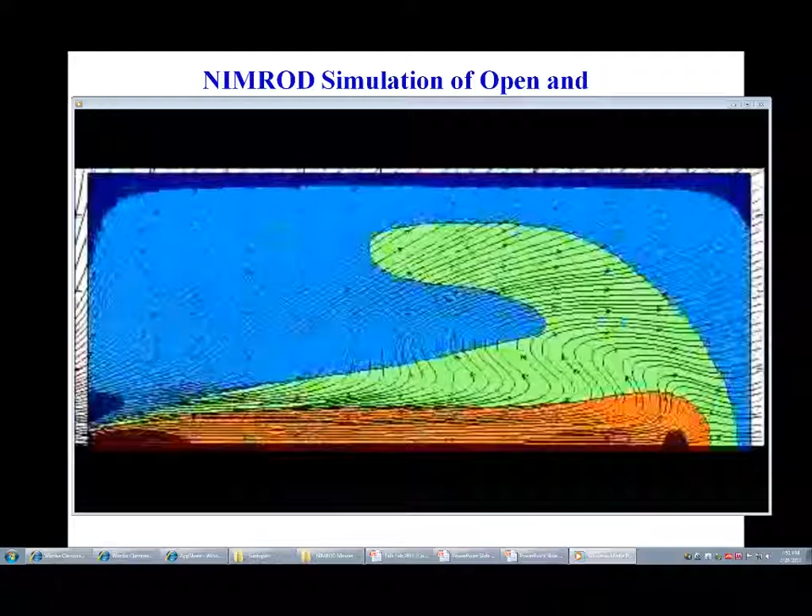So you see the black field lines, the magnetic field lines, and the plasma goes through, kind of distorting the field lines, almost like a rubber band. This is maybe 100 microseconds worth of life in this plasma going through the magnetic field. In this particular case, the simulation was a bounded simulation, so like you have a plasma tank, an experiment here on Earth, and then you see what happens.

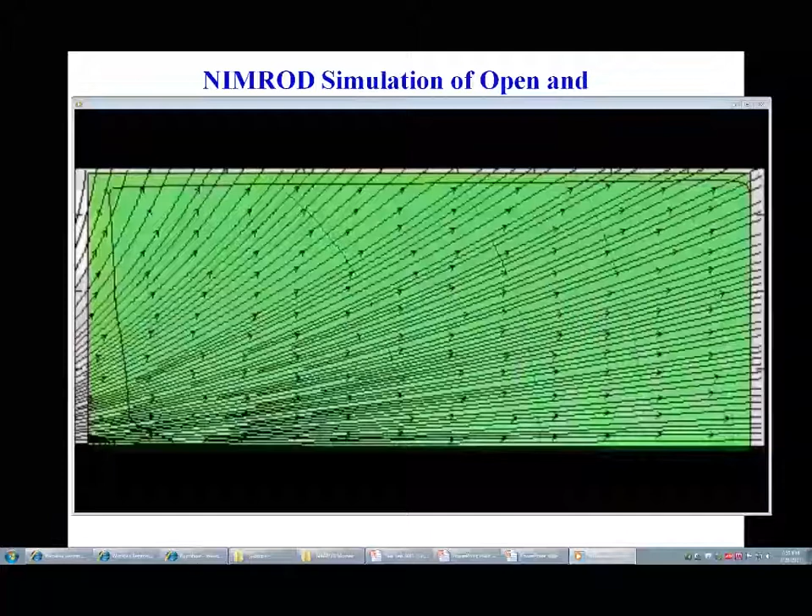You can also look at the space application version of that, where basically the flow goes through and leaves the system. You're really interested in what happens closer to the injection point, not too far away, because then you'd need a huge model and a lot of computer time. But for designing a plasma rocket, you need to understand how this magnetic nozzle works.

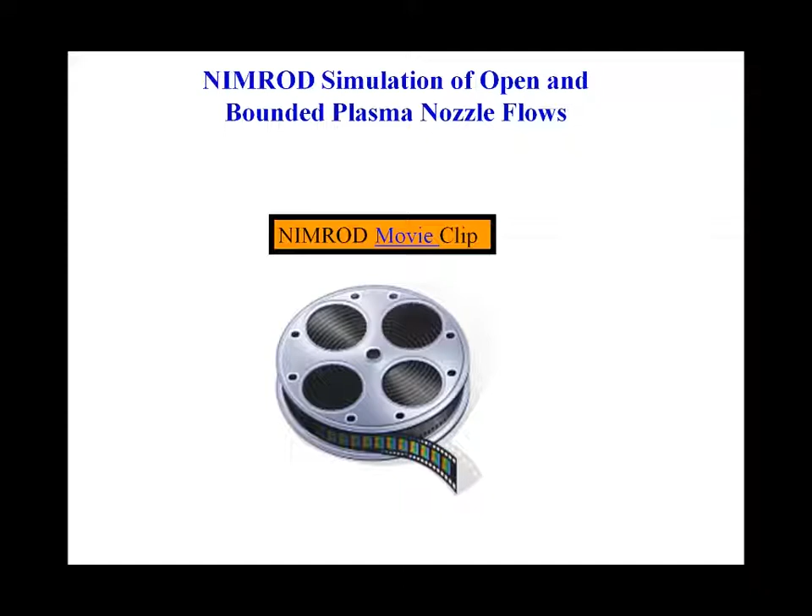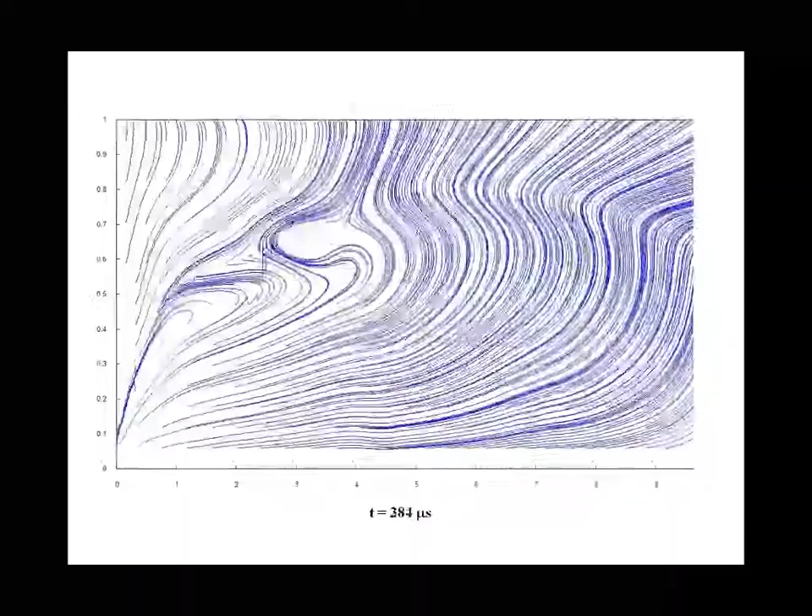And if you look at the field lines, these are a high definition picture of the field lines—I'm not showing the movie, just showing you the structures that are forming. That's what happens when you have this magnetic nozzle and the plasma goes through it.

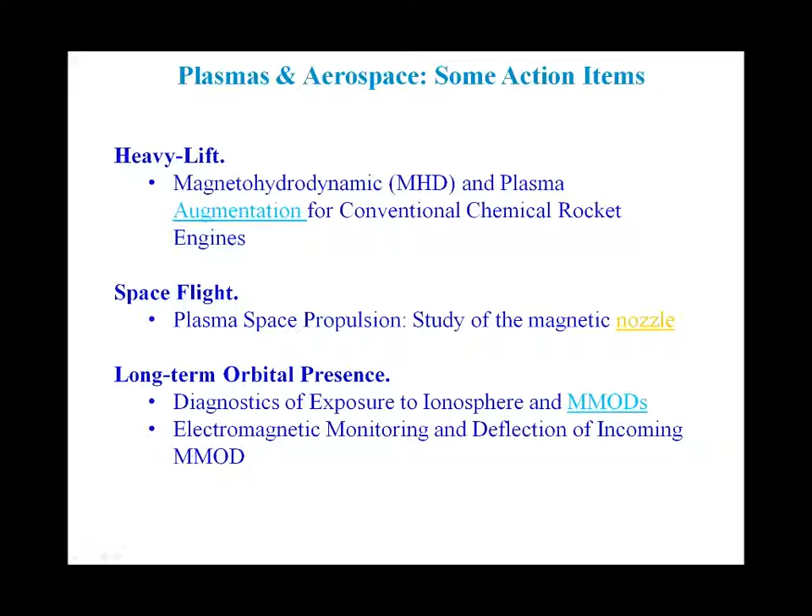There are some other things I'm not going to go into detail on. You can study, using plasma effects, what happens on the surface of the ISS, monitoring it to make sure it doesn't get ruined by bombardment—meaning, as you know, micrometeors and orbital debris. Some you can see on radar, but some we can't, and you only find out when it's too late, after holes get thrown in the surface. Eventually it can cause damage, obviously. So there are ways to diagnose that as well.

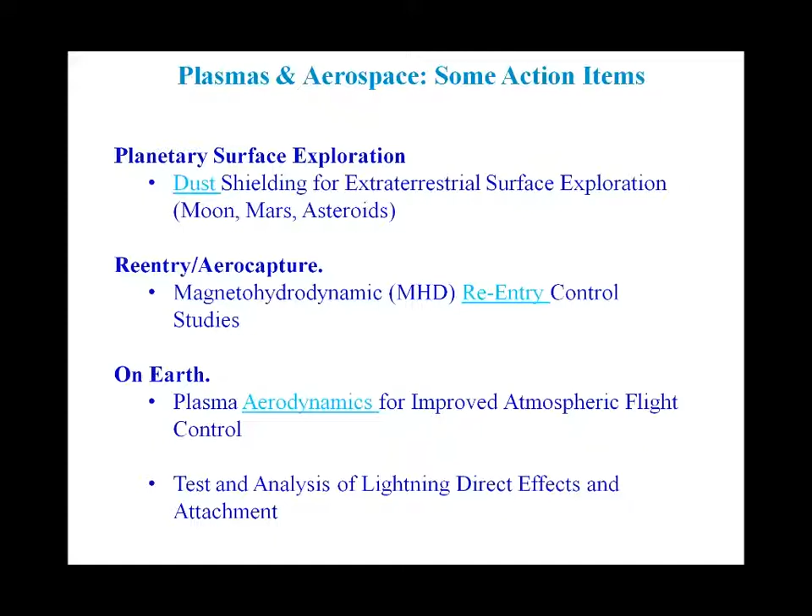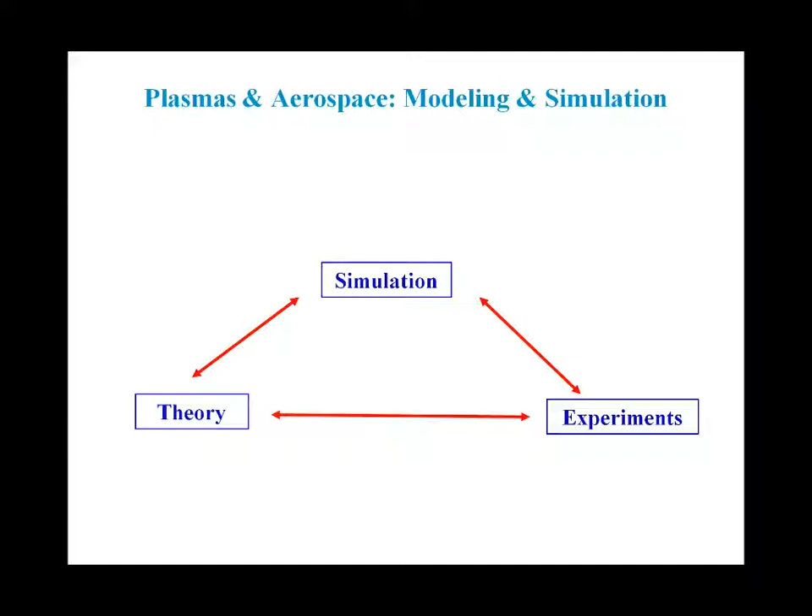Now, if you try to put them all together, you get an integrated modeling—that's a computer science project. You don't even have to know much about the physics. These are black boxes; they give data in and out. So you can do that without even being aware of what the plasma is like. That's what I was saying—you can bring computer science, physicists, and engineers together in doing this kind of thing.

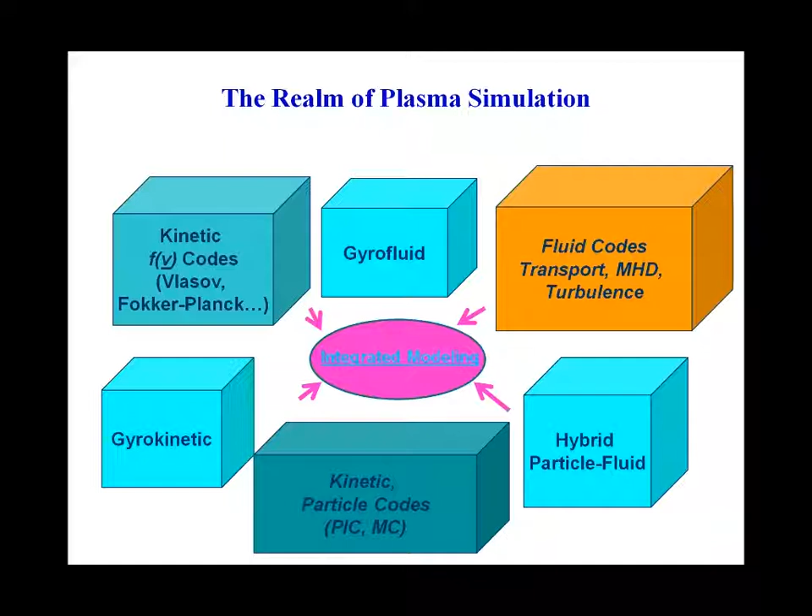This is not simple, okay? I mean, this is just PowerPoint engineering, obviously—behind this is a lot of stuff. It essentially boils down to making computer codes talk to each other as they run, in real time, and that can be done in different ways.

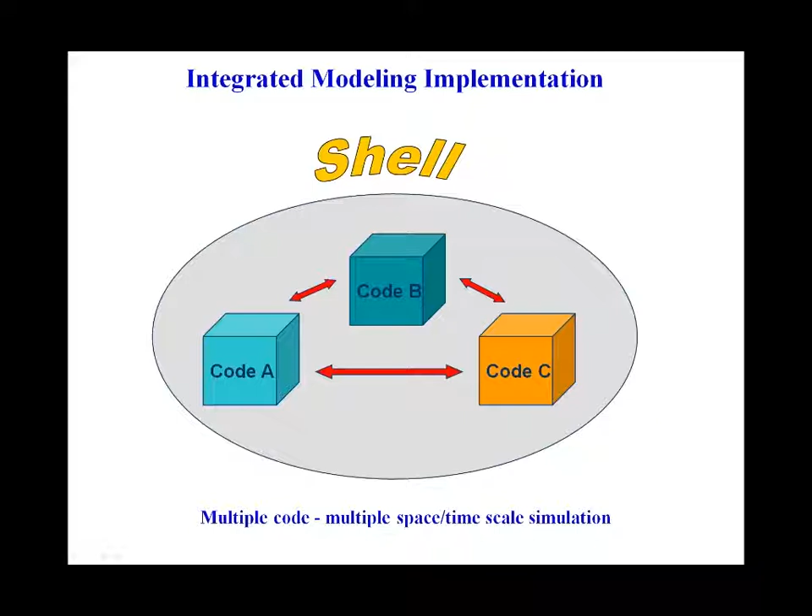If you have one single code that runs one particular problem, you study a physical phenomenon. If you have many codes talking to each other, you can go from a complex physical system to an actual engineering application, and that's what you need, because most of the time we're interested in a design which gives us a product that works the first time.

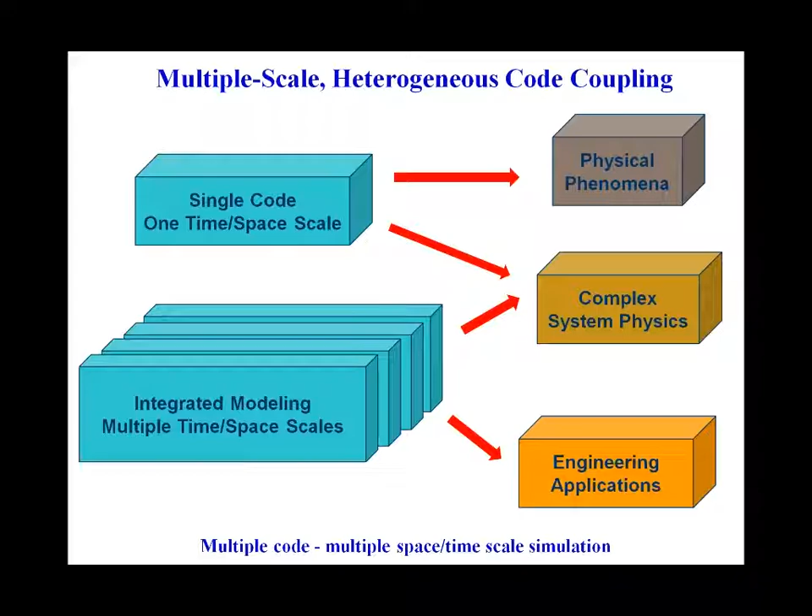We don't want to go back to the lab and change things. The system and the design are very complex. So I think I can stop here, and these are some of the interesting research topics that we have here, relating students, future students, current students, into maybe some graduate work.